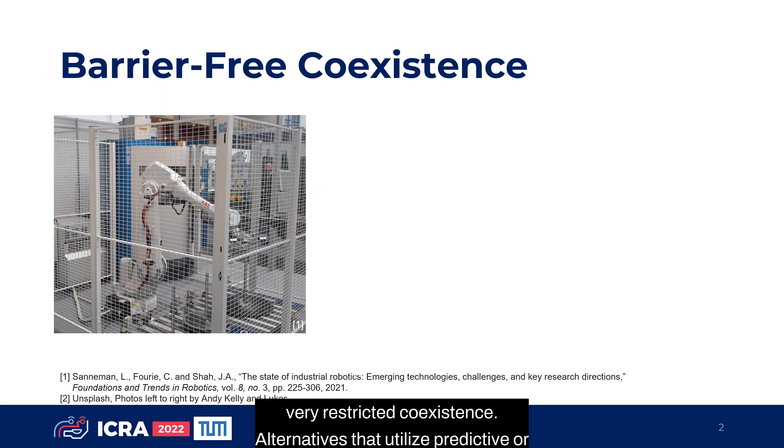Currently, most large-scale manufacturing relies on a combination of human personnel and robots for efficient production, where humans and robots are separated by caging and light curtains for safety purposes. This approach, however, does not enable any human-robot collaboration and only very restricted coexistence. Alternatives that utilize predictive or reactive control methods are not verified as safe according to ISO standards.

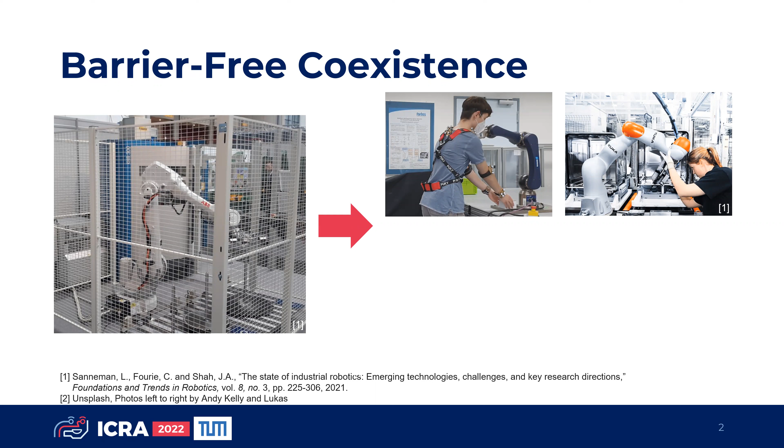Our approach eliminates these boundaries to allow humans to enter the domains of moving manipulators under guaranteed safety. The use cases for this kind of approach extend beyond industrial settings and into everyday human lives. We aim to enable widespread integration of collaborative robots in a multitude of domains by encouraging greater acceptance of robots through guaranteed operator safety.

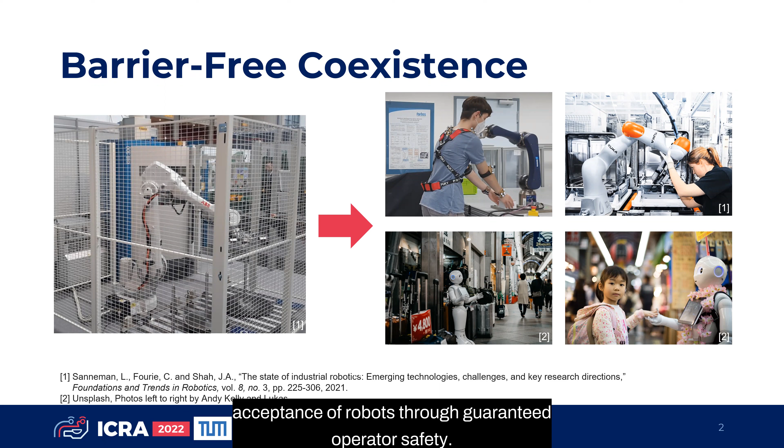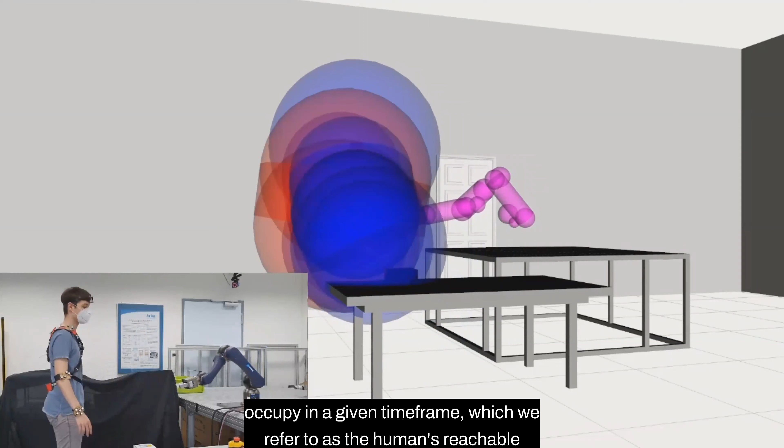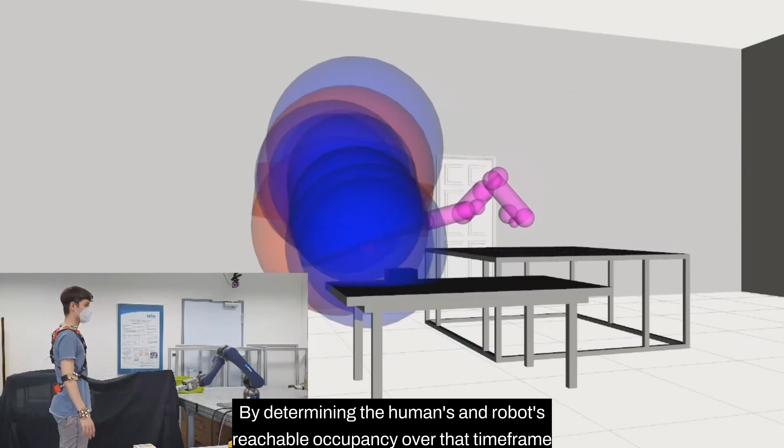To this end, SaRA determines the entire possible space that the human can occupy in a given time frame, which we refer to as the human's reachable occupancy. This procedure is similarly performed for the manipulator. The robot provides SaRA with the time it requires to come to a full stop based on its current velocity and acceleration. By determining the human's and robot's reachable occupancy over that time frame and checking for intersections between them, we can guarantee that the robot is at rest when it is touched by the human. This procedure is in accordance with ISO definitions of speed and separation monitoring.

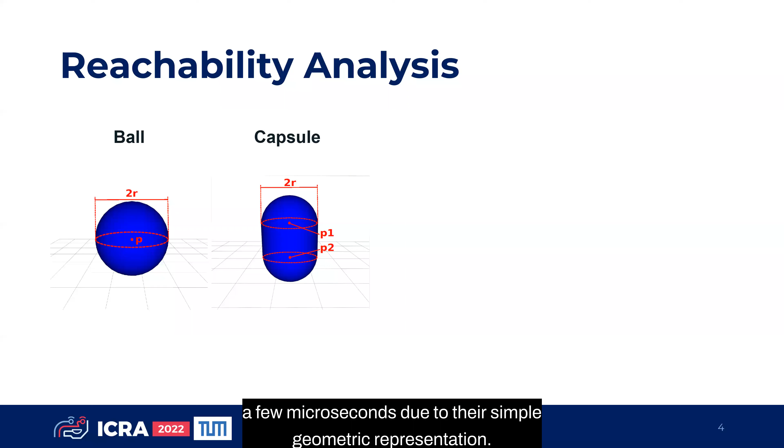The reachable occupancies and possible intersections can be determined in only a few microseconds due to their simple geometric representation. This allows us to compute occupancies in real time. Each body part of the human defines its own reachable occupancy in form of a capsule or ball, where balls are used for the hands, feet, and the head, while all remaining body parts are represented as capsules.

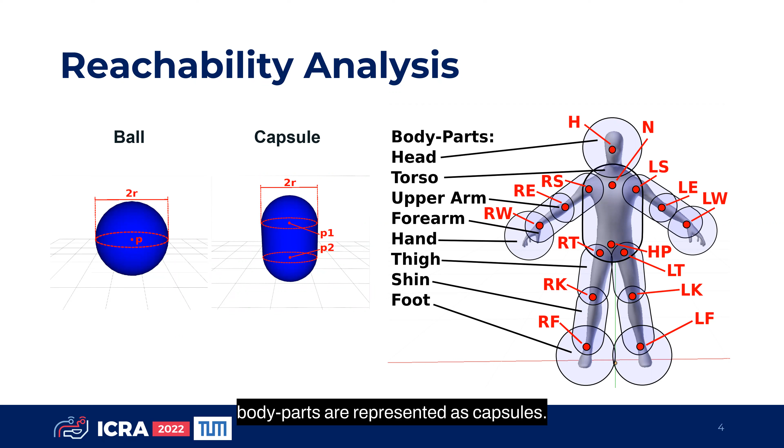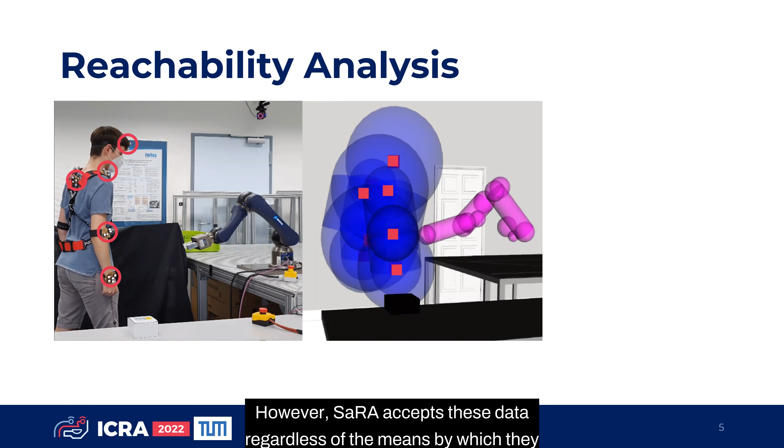In our experiments, we have used marker-based motion capture setups to determine the required Cartesian positions as shown here. However, SaRA accepts these data regardless of the means by which they were acquired, and we have previously tested our approach with light curtains, a Kinect camera, and depth sensors. Once the positions have been acquired, the occupancies are calculated based on linear motion models, and intersection checks between the robot's and humans' reachable occupancies are performed at every time step.

SaRA is designed as a header-only C++-based library and is itself independent of third-party software. Our architecture defines 3 layers of abstraction that allow for alterations at each level. The highest level describes the general type of obstacle we want to model, in our case, humans. Obstacles are then made up of a set of occupancies that are given a geometric representation on the final layer.

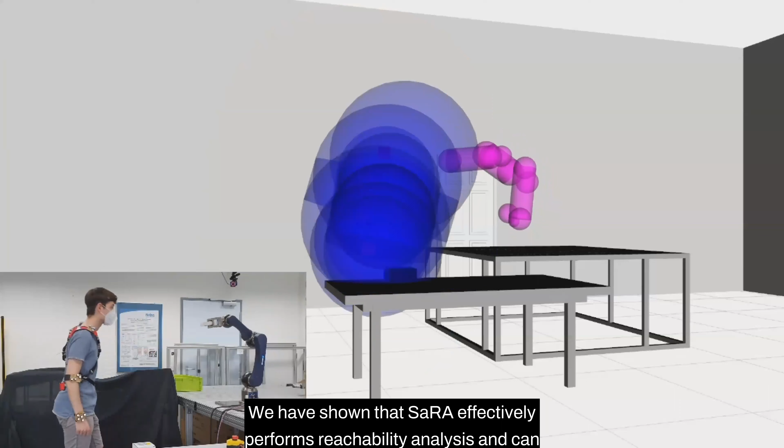This allows us to customize the obstacle definitions in great detail, for example, by introducing new geometric representations such as cylinders, polyhedra, or zonotopes. We additionally provide a customizable ROS package that can be used to visualize the results in RViz. We have shown that SaRA effectively performs reachability analysis and can guarantee the operator's safety during experiments in a laboratory setting. Our next goals entail tests with multiple trained operators in a manufacturing plant to evaluate SaRA's real-world performance.